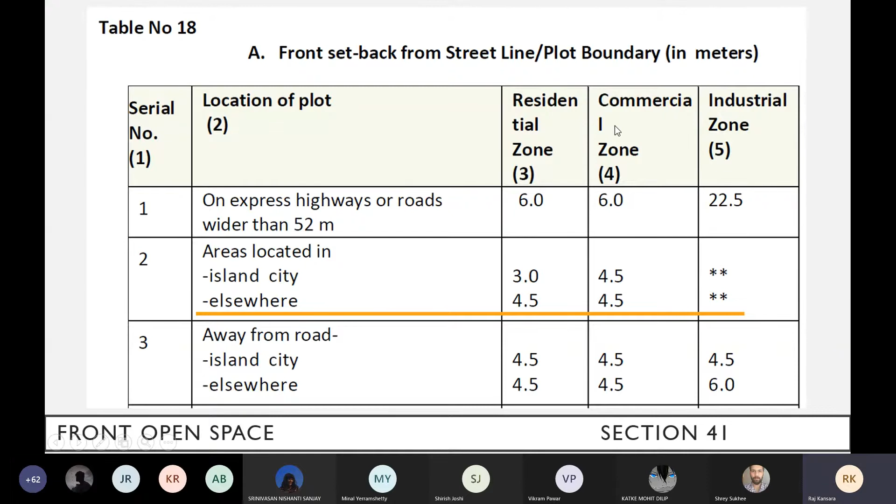Are we clear till now, or is there anything you're confused about?

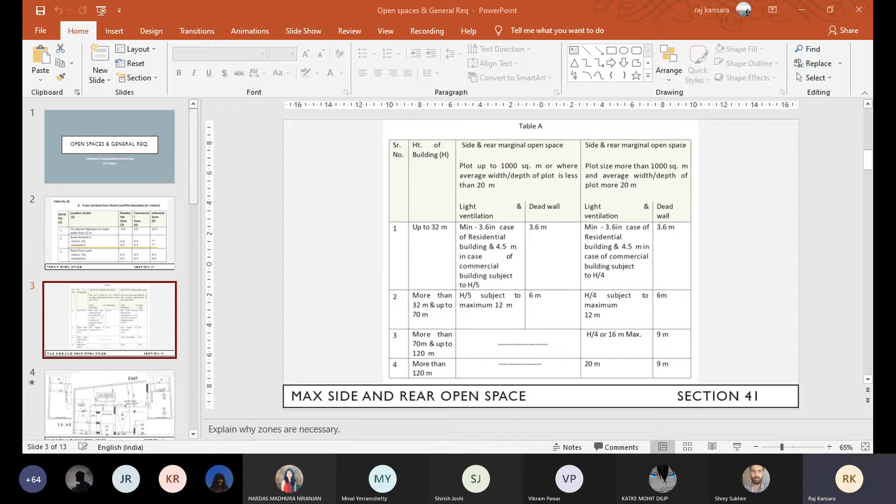Hello? Yeah, it's clear. Okay. Yes, I have. Are you able to see the screen? We can see the screen, it's full screen now.

So you see there are various requirements for open spaces for a plot which is less than 1,000 square meters and for plots which are more than 1,000 square meters. The minimum open spaces are stipulated here, following a calculation of height by 5 for light and ventilation. So if a building has a height of 32 meters, you have to provide a minimum H by 5 open space, so 32 by 5 is 6.4, which is your requirement in that case.

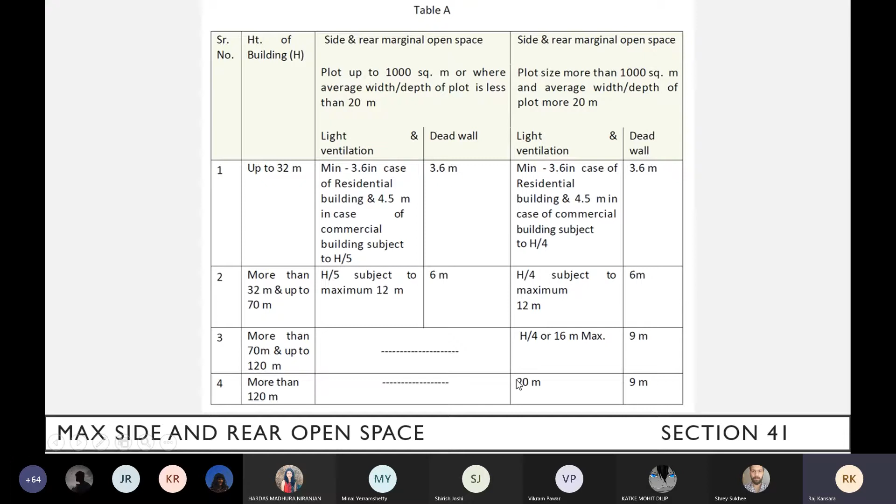For a 70-meter structure, you have to provide at least 14 meters as per the H by 5 calculation, but there's a maximum relaxation of 12 meters given by the government. And it changes for a building which is more than 70 meters and more than 120 meters.

Coming back to this, this is a 32-meter structure and the open spaces required are far less compared to a 70-meter structure. This building is in the suburbs, so I have to provide a 4.5 meter clear open space, and the side open spaces are 3.6 meters. Even the rear open spaces are in the range of 3.6 to 4.02 meters. So these are the kind of open spaces we provide for a 32-meter structure.

Just one point to add on. If you zoom to the front of the project, as you can all see, the 4.5 meter open space requirement is basically from the column to the compound wall. There's a building line above that's allowed after a certain point - on the ground floor you have to leave 4.5 meters clear, but above that you're allowed a certain cantilever or amount of building to come into that space. So let there not be confusion that that 4.5 meters has to run throughout.

This might sound a little technical, in fact from the previous table Raj shared too, but we want you to just understand it right now. Don't try to overthink it, because these things will become clearer as we go ahead in this course, because we'll be making you all go through a working example of how to implement these guidelines.

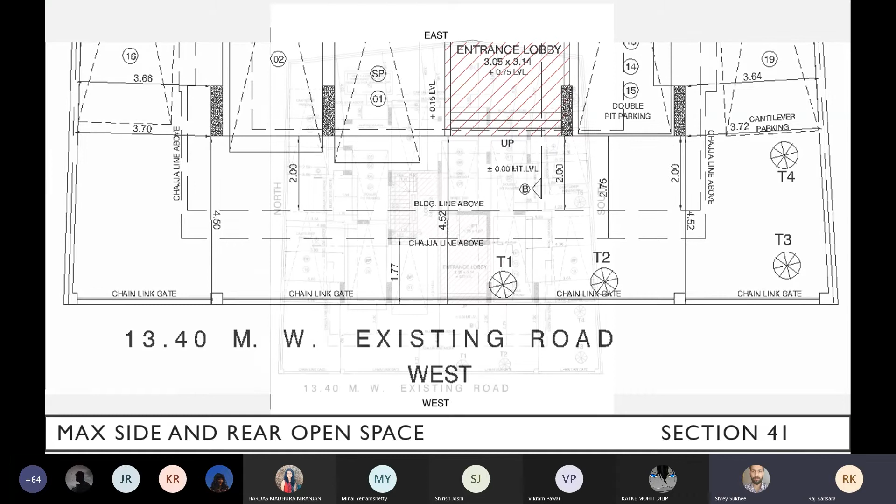And that can also become blocked - these kind of cantilevers are allowed subject to approval from the commissioners, so it's not always allowed. But I just don't want them to be confused about why that line is there. So, these kinds of open spaces are always provided from your column lines.

Another thing - when you go into a high-rise building which is up to 70 meters or more than 70 meters, you need to provide multiple staircases when it comes to having a running distance of more than 22 meters. In any building, up to 70 meters the staircase requirement is at least 1.5 meters - consider a staircase or corridor, you have to maintain a 1.5 meter passage and staircase. But as soon as you go above 70 meters, like the projects you're all working on, those passages and staircase widths will definitely be more than 2 meters, and the number of staircases and lifts provided are much more than what you'd see in a regular 22-story building.

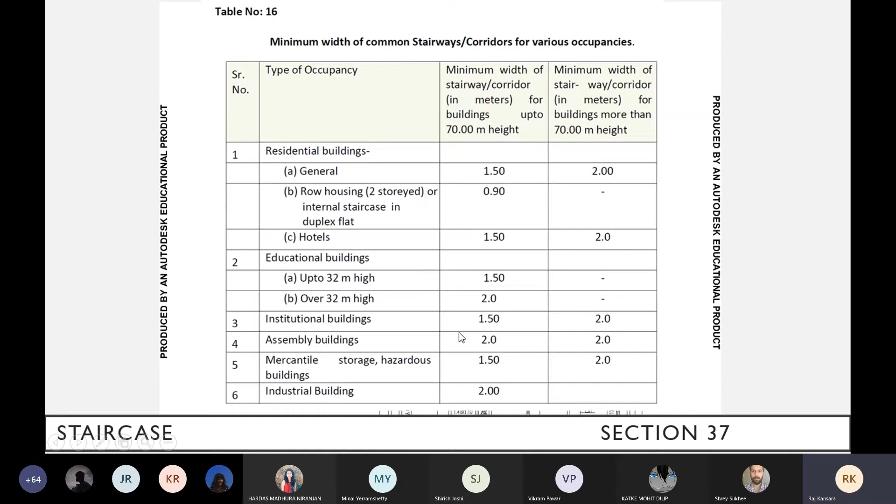So you see that for residential buildings and general buildings up to 70 meters it's 1.5 meters, and for buildings above 70 meters it's 2 meters. Each category has been defined - for education it's this, and for institutional buildings it varies.

The reason why we have a 2 meter wide staircase is that more people stay in this building, which is a high rise building. So for them to reach the immediate refuge floor, they use the staircase. Ideally, during fire, no lifts are allowed to be used.

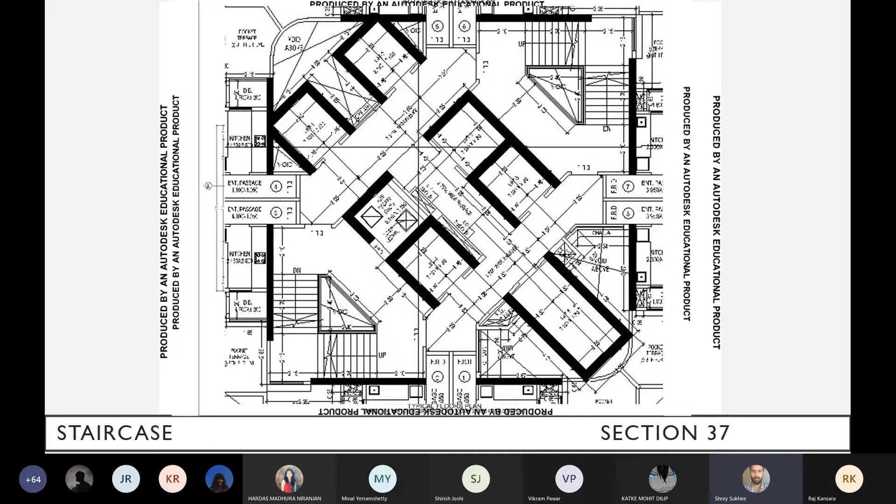I just want to point out to all the students here that while this might seem like you have to do this, you have to do that, please keep in mind that these guidelines have been made to make the building as safe as possible. In your future you might come across people who will try to change the system or work it for their own design benefit. I'm not going to get too much into that, but please understand that these systems are made to keep the safety of the user

in mind and to deal with it in the most optimal manner. Which is why many times, if you see buildings that have come up, I'm sure you must have read about it last year, there were a lot of fires in buildings. But if you actually go see it, these fires escalated because there were a lot of code violations that were there. So please keep that in mind when you go ahead designing buildings. Be a bit sensitive about these things, and yeah, that's it for me.

As far as these are standard specifications, you can modify them only to an extent which is acceptable.

So, I'll just skip this for the time being. If you see, high-rise buildings sometimes have podiums, some may not. These are the kind of open spaces that we need to provide, which are compulsory. Any building going beyond 32 meters needs to have at least 6 meters of clear open space at the ground level throughout the building, that is, from your building line to the plot boundary on one side of your plot.

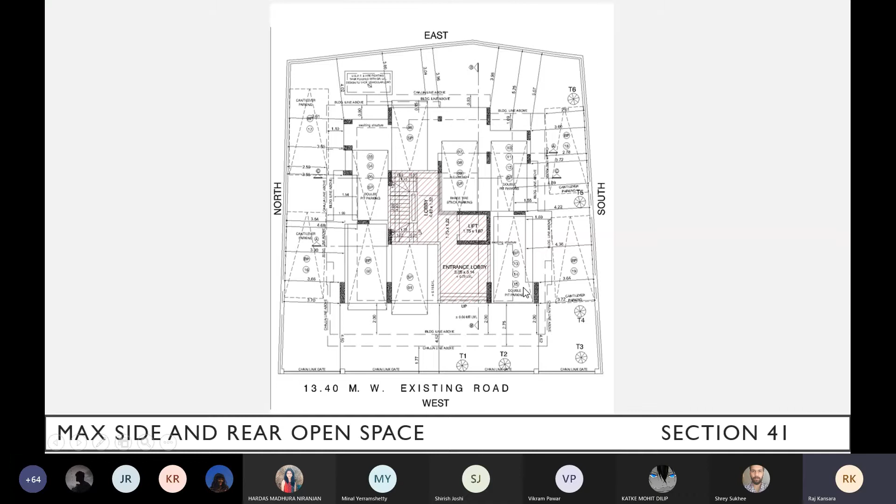When providing a podium, you need to maintain at least 6 meters from your podium line. It's not necessary that you have a building 9 meters away, but you have to maintain a 6 meter clear open space when the fire engine does not have access to the podium. Compared to this diagram, the fire engine has access to the topmost podium, so you can maintain a distance of 1.5 meters from your compound wall. This is allowed because the fire engine has direct and close access to the building.

This is about a 70-meter structure, but as soon as you go above 70 meters, up to 120 meters, the 6 meter clear open space has to be a minimum of 9 meters. So in this case, it has to be 9. Here also, when I'm having a podium, I have to maintain this as 9 meters. I cannot keep this as 6 and then additional 3 meters. That is not acceptable for the fire department.

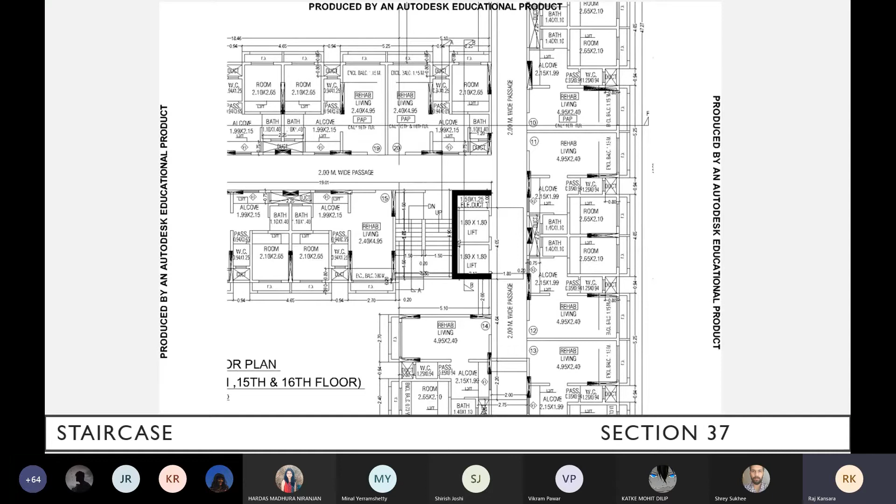Now, coming back to the fire requirement of refuge areas: up to 70 meters, you have to provide a refuge area on every seventh floor. So the first would be on the seventh floor, thereafter on the 14th, and then the 21st, and similarly it keeps on multiplying by 7.

When we sit with the exercise which you all have completed in the last semester, and when we work on those drawings, we will go a little bit more in detail about the fire requirements, about the kind of refuge area to be provided.

Also, any building which is above 70 meters, you will have to provide a fire chute. It is a compulsory requirement. You have all your dimensions, minimum dimension requirements, and you guys must be knowing what is the reason of providing a fire escape chute.

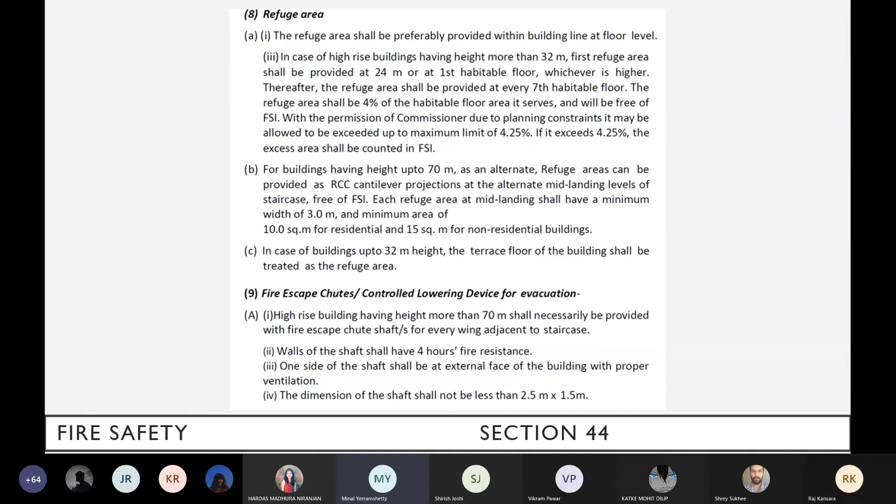Can anyone say? Have you guys seen a fire chute before? We've heard of it. So what is the use of it? Raj, why don't you— we have done this last year, fire safety and things like that. It's a part and parcel of their third year portion. But I doubt whether they've seen it because no case studies were done due to the pandemic.

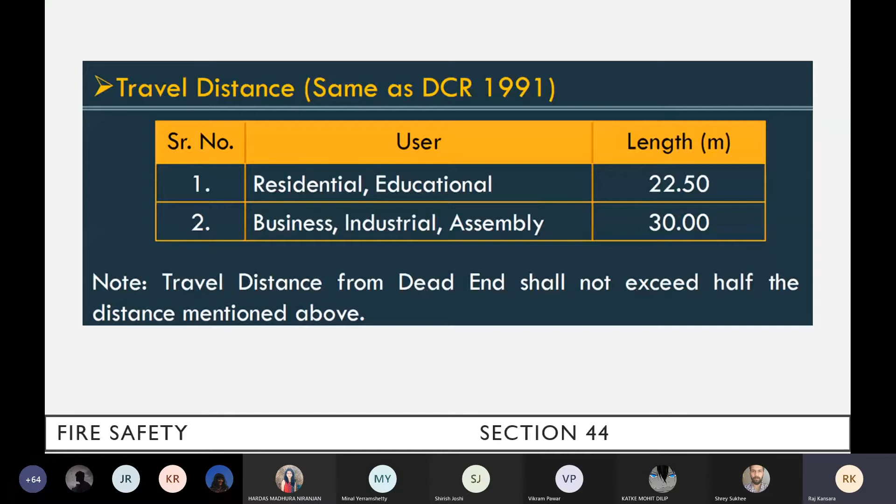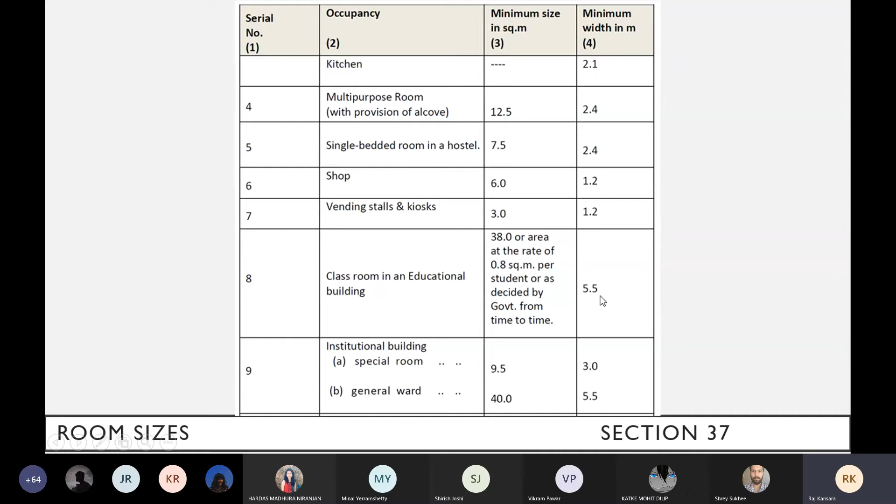Again, the heights required in a habitable space: you cannot provide a habitable area with less than 2.75 meters clear height. So these are the kind of requirements defined in the regulations.

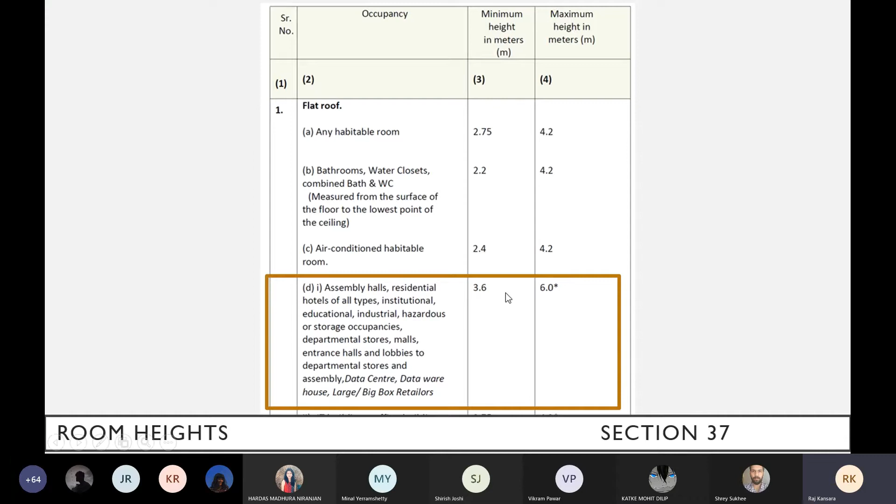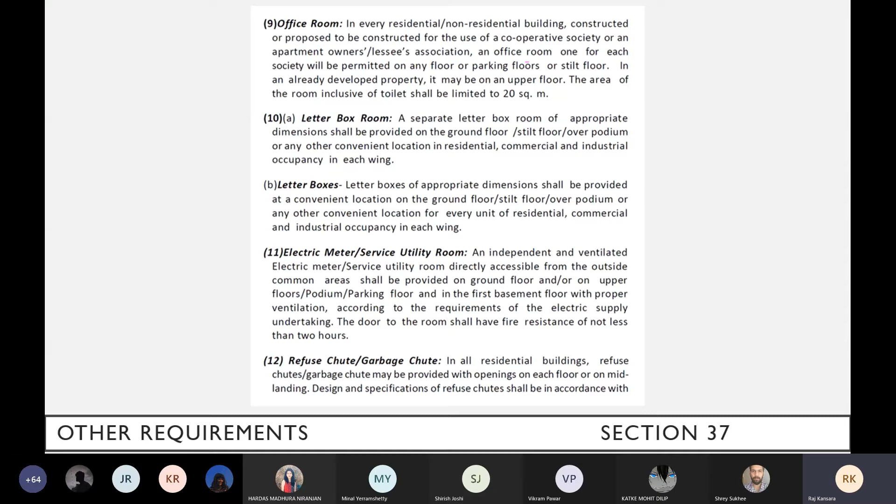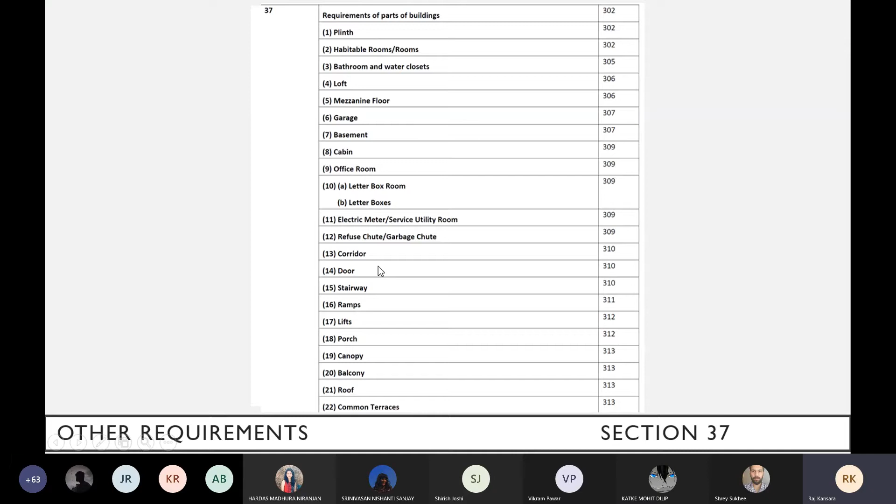In any building, these are the kind of rooms which are to be provided: you have a society office, meter rooms, service utility areas, refuse chute, garbage chute. These are the requirements of the parts of the building. So when you design a building or submit it for approval, these are the building parts which need to be looked at from the regulation point of view, whether they meet your design requirement or whether you need to modify your design to suit the DC regulations.

We won't talk about the parking at the moment. We will take it up in a later stage.

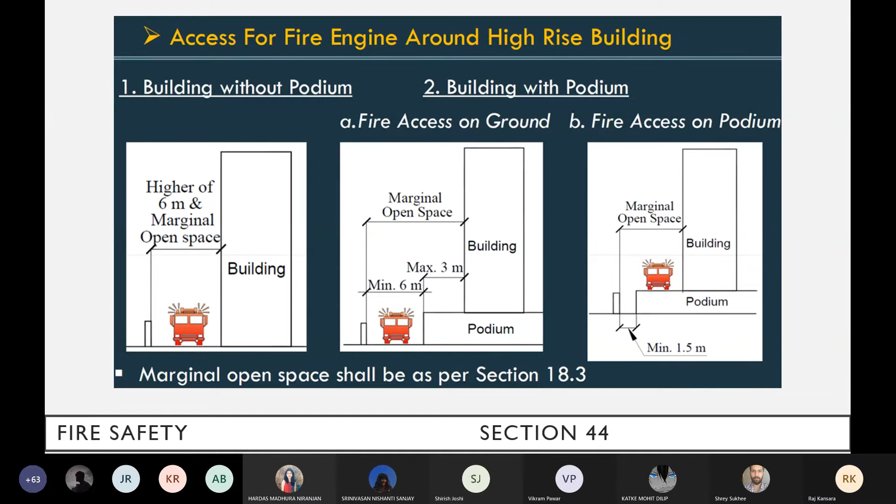Shrey, you want to add something? And Vikram? I think we're good for now, but I just want to—okay, yeah.

So just one point guys, see this—I don't know if you all can get access to it online. I will share with you—I'm sure you all must have it already—the DCR rule book in PDF format. It's released by the government only for you all.

I know this all seems very dry, and you may wonder how do you remember all these things? It is a question of practice and general awareness.

The main thing I wanted to say is that these rules which are applicable to Bombay, Mumbai specifically change from here to Thane. You have separate rules from Thane to anywhere else, and if you take this across Maharashtra or any part of the world, each local municipality has their own local rules.

I want the main takeaway from this to be that okay, all these figures have been thrown at you, but know that there's a handbook which you always have to keep referring to. That's like your Bible when it comes to designing, at least in the initial stages. Once you're a practiced architect, these things become second nature. But I want you to know a few things.

Firstly, be more aware. Going henceforth, if you look at any building, any project or structure, this should come like another dimension or another lens added in reading the building. Look at the open spaces around it, how much space have they given, and then depending on your study, you can follow it up - is this the bare minimum or have they given extra?